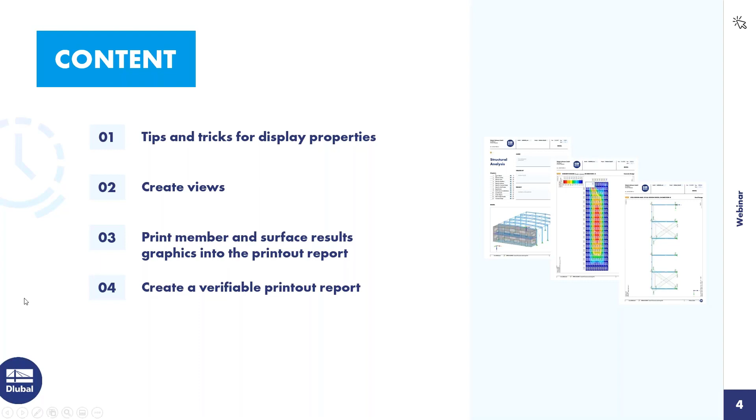Okay, then we turn to the program. That's the model of today's webinar. There are members of steel and surfaces of concrete. I designed the steel structure and that slab here. But before I start, I would like to introduce something - I would like to show you the loads.

So without results, we have the self-weight load case with the roof loads and the loads on the slabs. Then the imposed load with the loads on the slab.

The snow load case - for the snow load, I use the snow load wizard. I can display it by right-clicking on the load, not separately. That's the load from the snow load wizard.

And if there are members below, then the program creates member loads automatically, and you can see that here in that setting. Okay, the same is valid for the wind load case, wind in X direction.

I can display it separately as well. Here are member loads, and on this side, surface loads. So wind in X and wind in Y direction. I created only two wind load cases in this example.

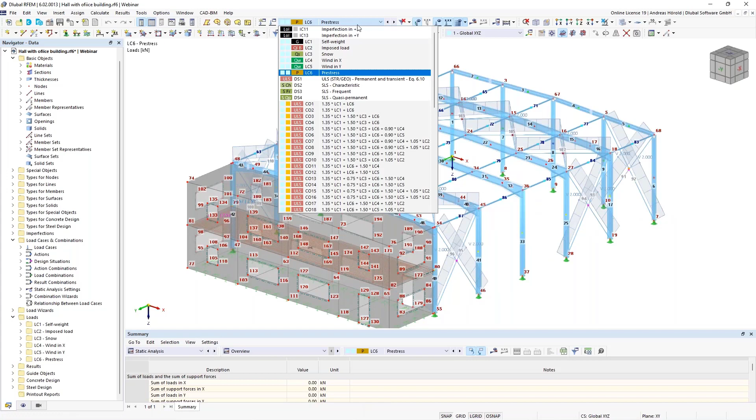And the last load case is the pre-stress. We've also got imperfection cases, so in X direction and Y direction. Okay, that's all for the loads.

Then here on the left in the navigator data, I right-click to open that dialog - load cases and combinations. I go through this dialog very quickly. In two weeks, I will present a webinar that covers the load cases and combinations dialog in detail, describing these dialogues only.

I used for the combinations the Eurocode 0. Now you can see here different standards, international standards. And for the Eurocode, there are a lot of national annexes implemented. I use the German national annex.

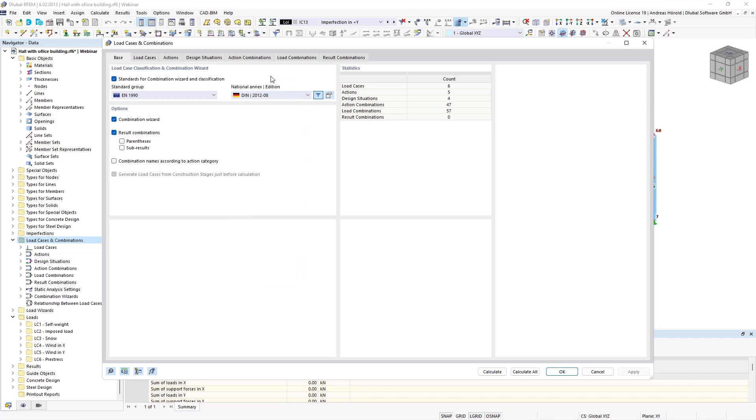Okay, then the load cases - the six load cases that I introduced at the beginning, the actions. For example, the wind action has the two wind load cases assigned, and they act alternatively.

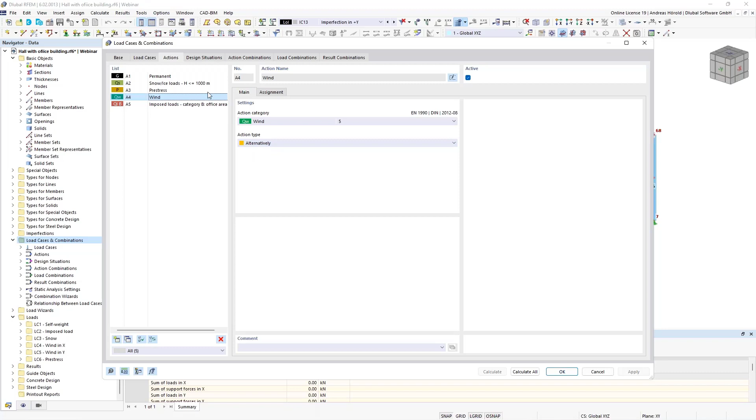Then the design situations - design situation number 1 is used for the concrete design and steel design, for the ultimate limit state design. Then design situation 2 for the serviceability limit state design, characteristic - it's activated for concrete design and steel design. These two design situations for serviceability limit state design are activated only for concrete design.

So if you click on overview, you can see which load combinations are assigned. I can click through them. Okay, and here in this dialog you can see all 57 load combinations.

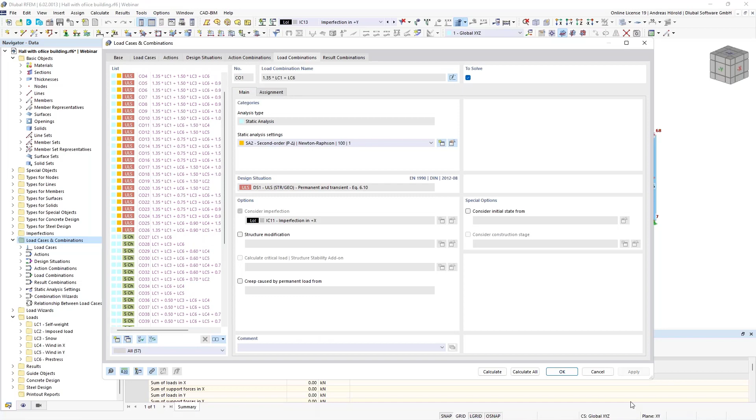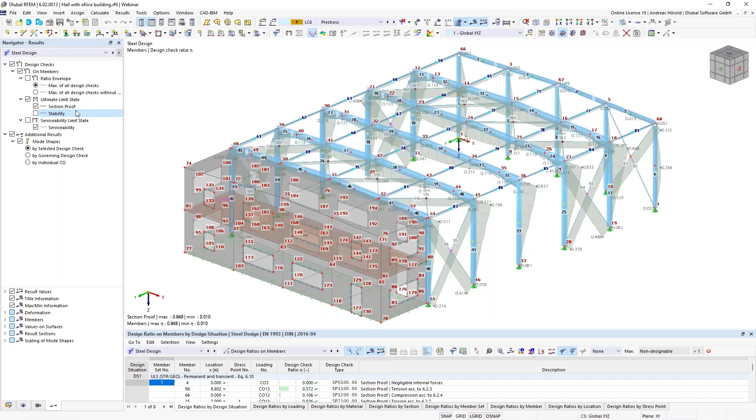Okay, although they are displayed in different colors, you can see it's quite confusing. That's why we print not only the isometric view with the separate design checks, but also create views in axis 1, axis 3, and axis A, with the multi-print feature.

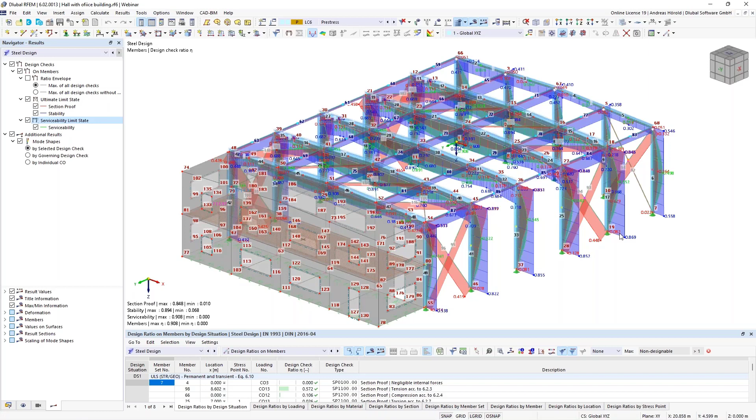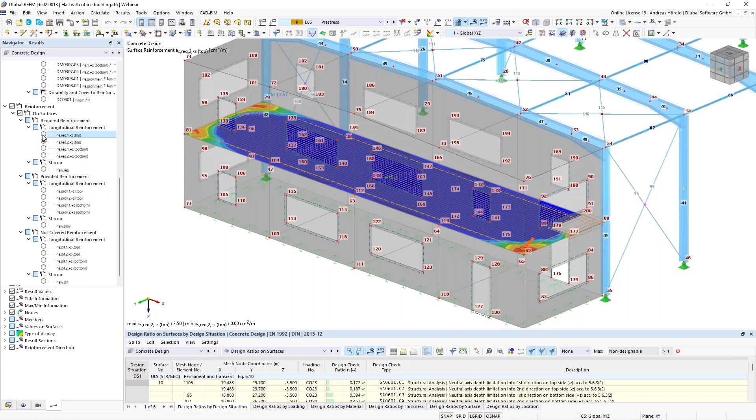Okay, I disable it. So then I show you the concrete design. I designed only this surface here, the slab. I can zoom a little bit in with the mouse wheel. So here in the navigator results, I can click through the required reinforcement, and I would like to print these 4 graphics in the printout report later with one step.

Okay, then parts list. We will also print a parts list in the printout report. I will come back to that later. That's a new feature in RFEM 6 and RSTAB 9.

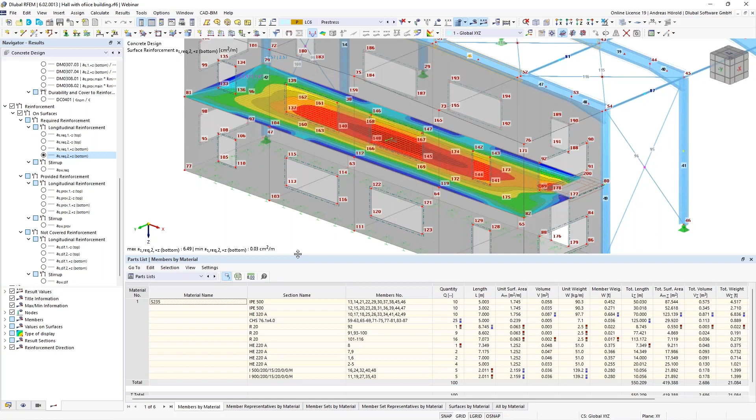So before we print anything, I define a line grid. Just a moment. Static analysis. So, line grid. Left above in the menu: insert, then guide objects, line grids. Usually you define a line grid as a first step, not afterwards.

I do that retroactively, and it's not a problem, you can do that anytime. I would add a label text. Then here, line grid, I have to enter the distances here in X direction, 4 times 5 meters. You can edit or change the labels here, but I leave it as it is for this webinar.

Okay, then also 5 meters in Y direction, 5 times. And a short distance, that's the distance between the concrete and steel structure. Okay, that's all. I can apply it, and I'll see it in the preview.

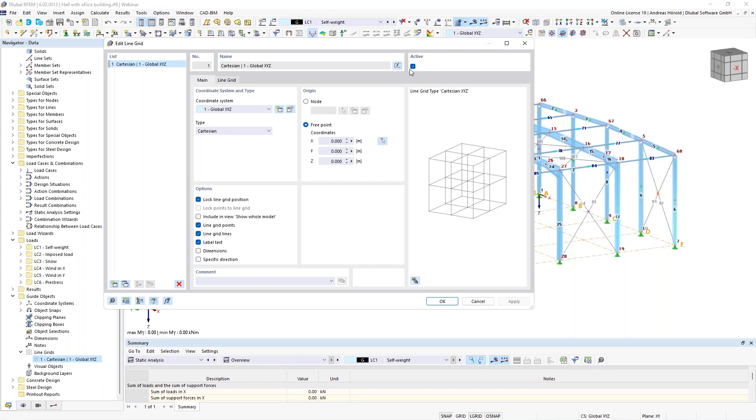Okay, if I would like to change anything in the display settings for the line grid, I can click on it with a right click and open it. Just a moment, I load the white background. So I can leave the dialog again.

So, right click, I show it again. Display properties, and you will get directly to the category here. And a tip from my side: the categories in the display properties are similar to the categories in the navigator data and navigator display. If you want to find anything, you can right click on the object, find it here, and it's easier to find the object in the other navigators.

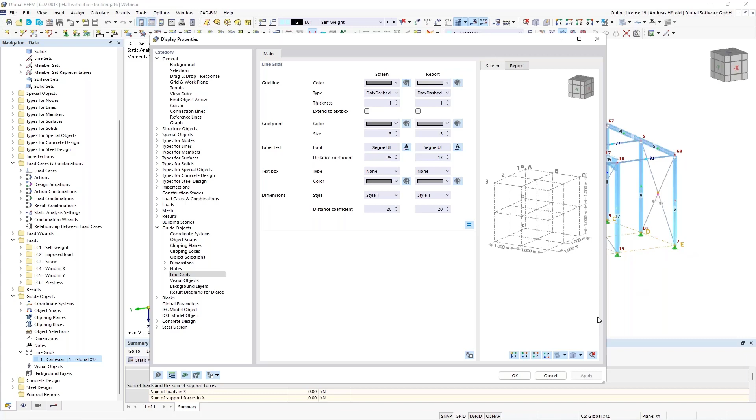Okay, then I change the font to bold and size 12, and change the distance here. Okay, and just take a look at the text here. When I press apply, it will be larger. Okay, so now the line grid is complete.

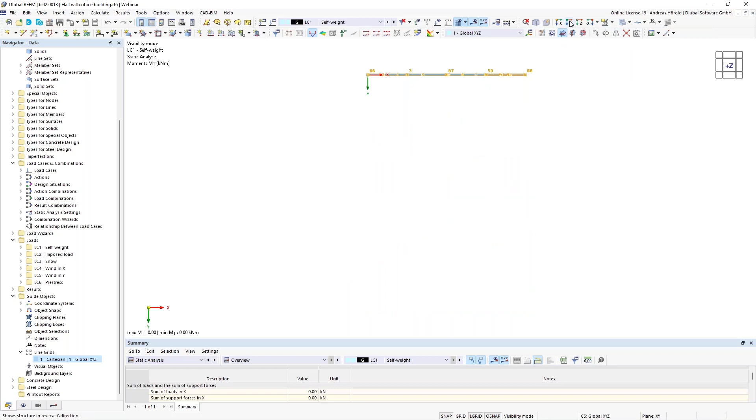I know where each axis is and can start with the views. Here right above, I click on view in Z direction. Then I select all objects in axis 1. Press visibility by selected and related objects. Change the view in -Y direction. Okay, and that's the view I would like to create.

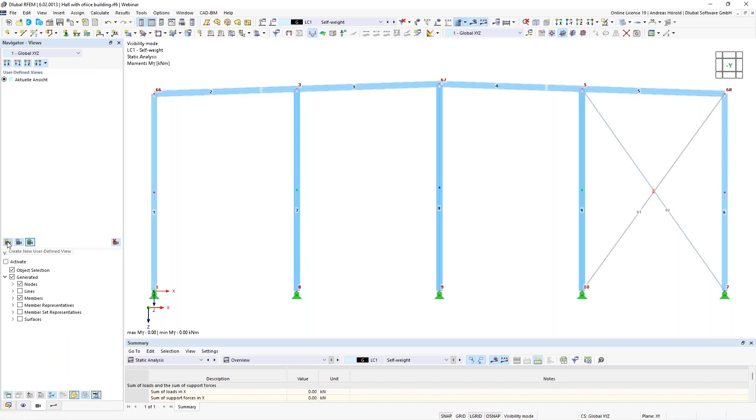So at the bottom here on the left side, I change to the navigator views and create a new view with that button here. So I call it axis 1. That's the first view.

Right above, I click on cancel visibility mode, change the view, select all objects in axis 3. Then I display only these objects, change the view again, and I can save the next view, axis 3.

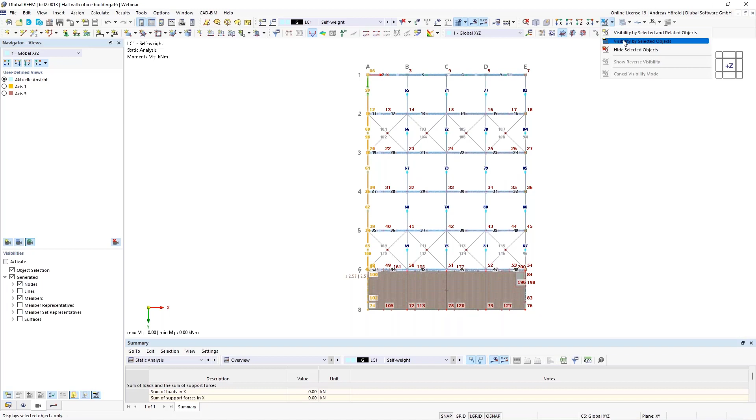Okay, then the same workflow again. So, all objects in axis A. Then view in -X direction. Okay, I can zoom a little bit in. Now I can cut the concrete structure, it's not interesting to our results for the steel design. So, axis A.

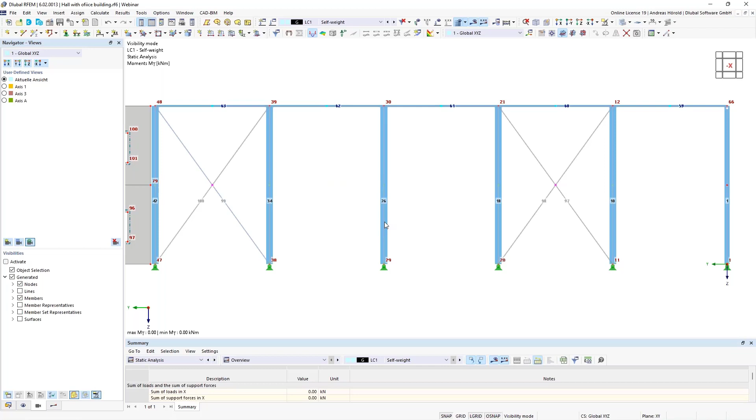So then I cancel the visibility mode again, and I select the concrete slab. Let's display only this one. Change in Z direction. And I would like to create a view also for this slab. So as you see here, I created a surface reinforcement for the concrete design. It's a mesh.

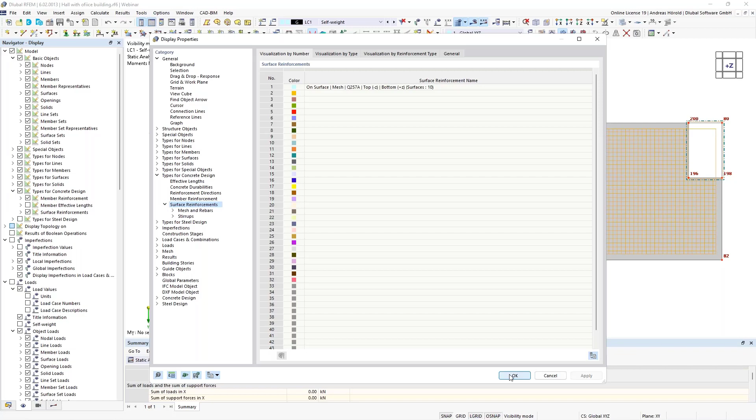Q257A, sorry. And I would like to deactivate it, or I don't want to display it, so that it doesn't disturb the displaying of the results. But I'm not sure where I can find it in the navigator display. That's why I apply the tip I gave you: right click, display properties. You can see in the category under types for concrete design, you can find the surface reinforcements. You could change the color here, but I don't want to change anything. I used it only to find the category for the navigator. Types for concrete design, surface reinforcement - I can deactivate it for the display.

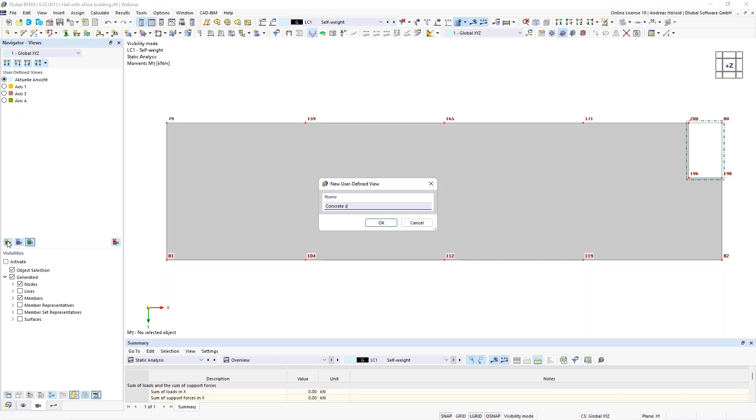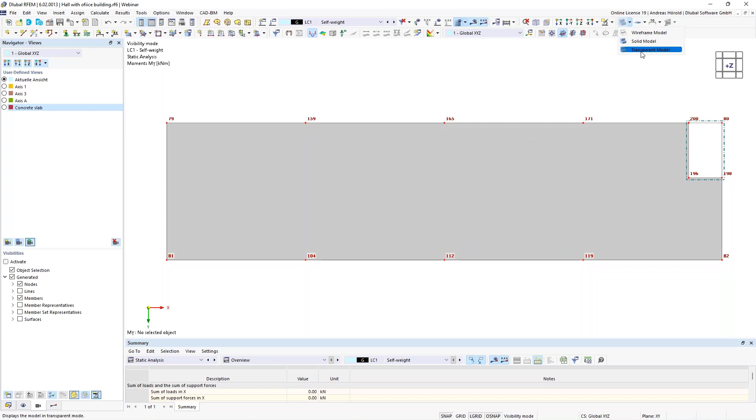Okay, then I create the next view. Concrete slab. Now I recognize that the gray color here can maybe also disturb the displaying of the results. I use the view transparent model and change to wireframe model. But now I have to update the view. How to do that? I unlock the views with this button here, then with the middle button I redefine according to current view, then I lock all again, and then I can switch between different axes and see the view is updated.

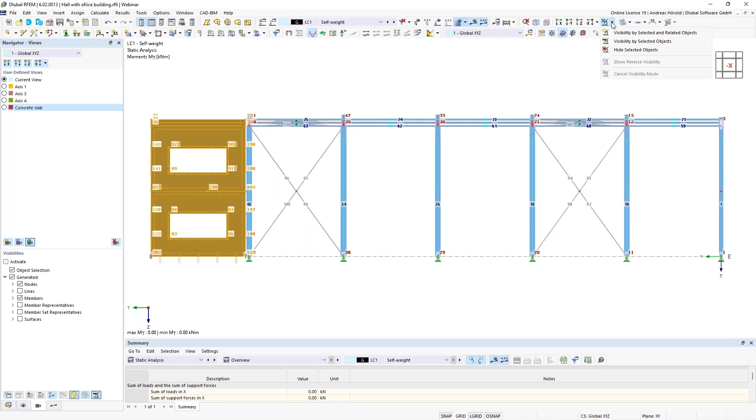So then all views are created. I cancel the visibility mode again and use the transparent model. For the isometric view that I want to print also in the printout report with the steel design graphics, the concrete structure maybe disturbs also the display. That's why I would like to deactivate it, or I don't want to display it. So that's why I select all, and here right above I hide the selected objects.

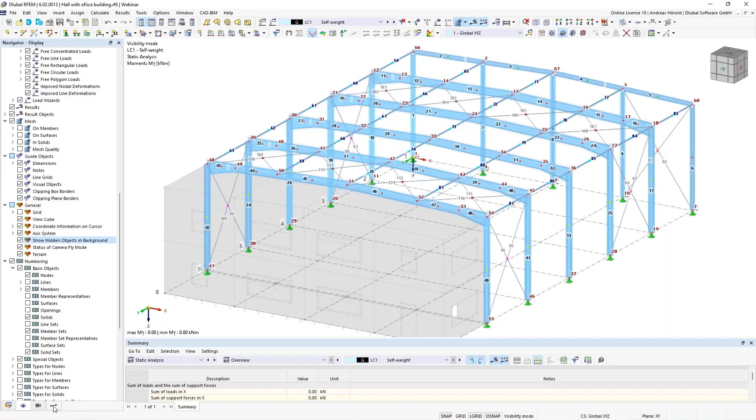So now it's not visible. Maybe we can display it but hidden. How to do that? I change to the navigator display, scroll down a little bit, and under the general settings you can show hidden objects in background. I like that more. So then in the next step we can print the steel results, so I can display them again.

So, okay, maybe I can rotate it a little bit. I would like to print that view and the other views. So left above here, you can open that drop-down menu and select print graphics to printout report.

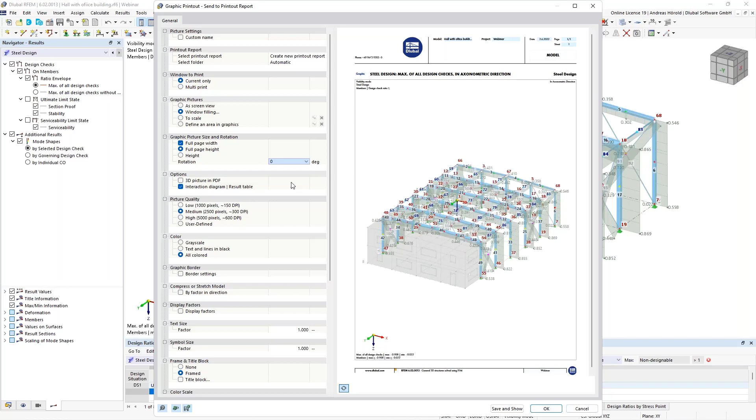So then you can see a preview here. You can rotate the graphic - that would be 0, and if you want to rotate it in a clockwise direction, then for example 90 degrees, you need to select this. But I would like to rotate it 90 degrees anti-clockwise, that's why I use 270. So you can use a screen view or window filling, it doesn't matter. And if you want to print only this graphic in the printout report, then press OK or save and show.

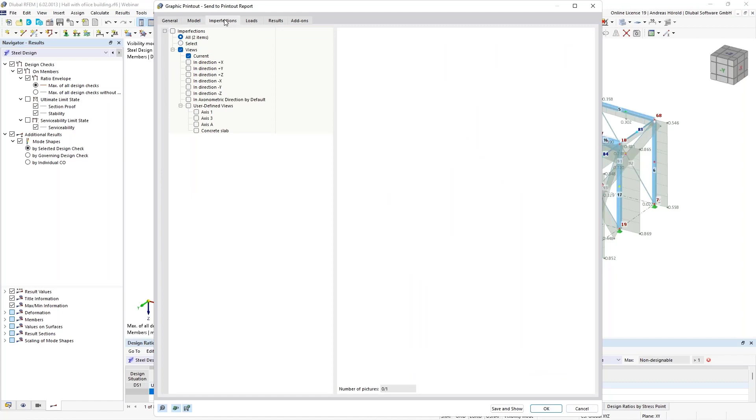That's quite easy, but I would like to use the multi-print feature. So I go through the single dialogues. I don't want to print the model, no imperfections, no loads, no results - it's of course possible to print the member results, for example the internal forces, but I would like to print only the steel design results in this webinar. So the current view, that was the isometric view, then the saved axis. Then on the right side I select the maximum of all design checks: the ultimate limit state, section proof, stability, and the serviceability limit state design.

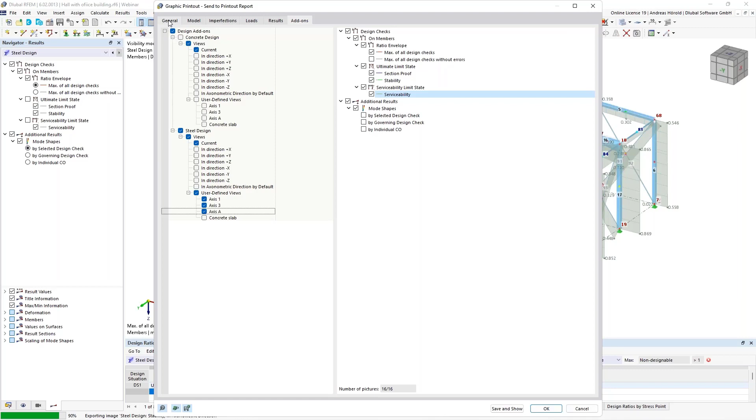So at the bottom you can see there are 16 pictures that are created in a few seconds. I switch back to the general dialog, and all images are created. So that's the isometric view with the 4 design checks. Then axis 1 with the 4 design checks. You can see in the preview it's quite good readable in the views. So this is axis 3, etc. Then I press save and show.

And we turn to the next dialog, printout report manager. Since we open the printout report for the first time, we have to select what we want to document. Here at the bottom left, you can load from a template. There are different templates already available, for example the input data and reduced results - that's the default setting - then the concrete design, steel design, etc. So I use the default setting. And of course you can save a template with this button here, save as template.

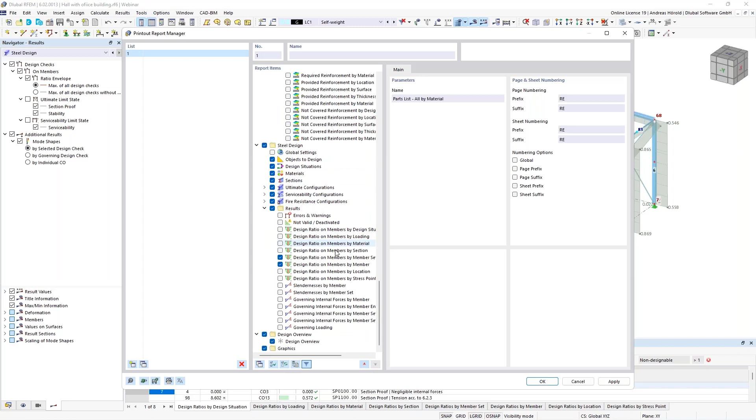Then the parts list - I select only this one and this one to show it later in the printout report. So then, for example, concrete design, where are the tables with the design ratio and surfaces selected, then the required reinforcement. For the steel design, the design ratio and members by member set and by members.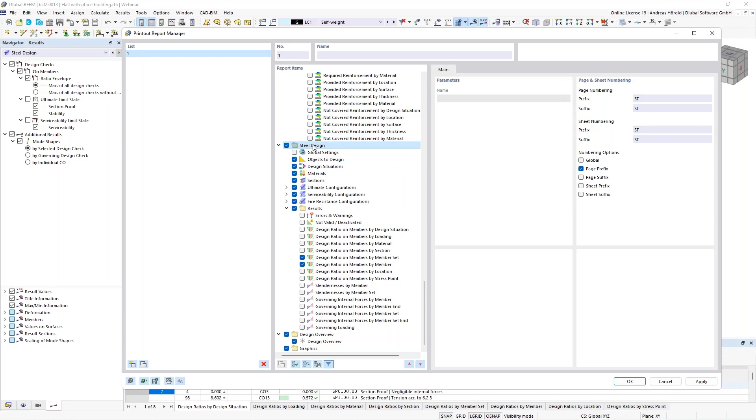On the right side, you can select page prefix, then prefixes will be added, for example for the steel design, ST, or for the concrete design, CO, or for the model, MO. Then the printout report is creating. At the first time it takes some seconds. Okay, that's the printout report.

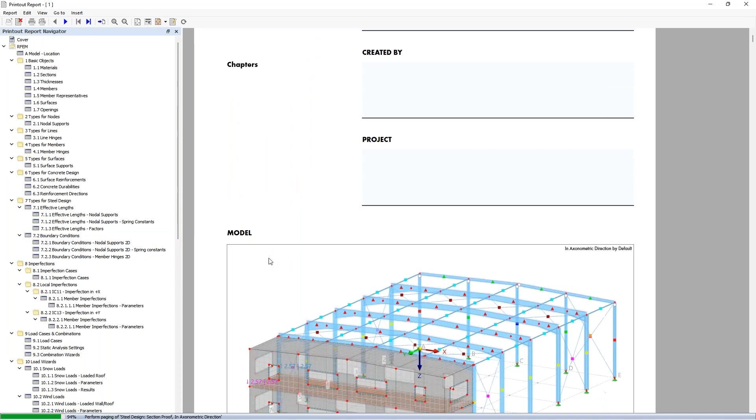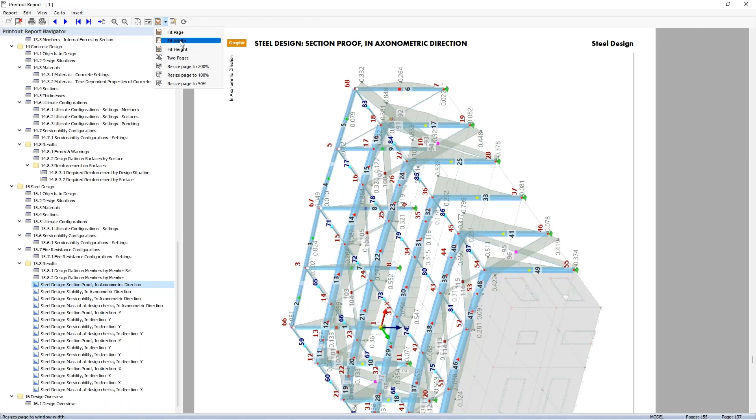On the left side, you can see the content, and what's interesting to us in the first step are the graphics here. Above, you can switch between different displays, for example fit page, fit width, fit height, and so on. 2 pages - I fit the pages.

Okay, so the 4 graphics for the axonometric view - then axis 1, axis 3, and axis A. As you can see, the last 4 graphics are with the concrete structure, and yeah, I can modify that.

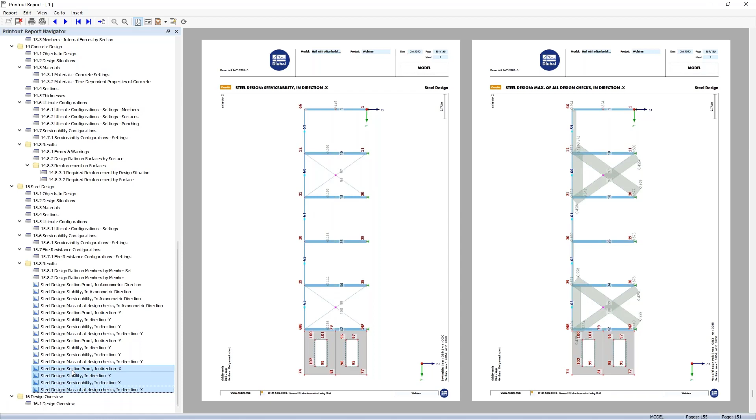With the Shift key, I can select all 4 graphics here on the left side. Then I do a right click, go to Properties, and select not window filling, but as screen view. All 4 graphics will be updated in the next seconds. So let's take a look. Okay, now the concrete structure is cut again.

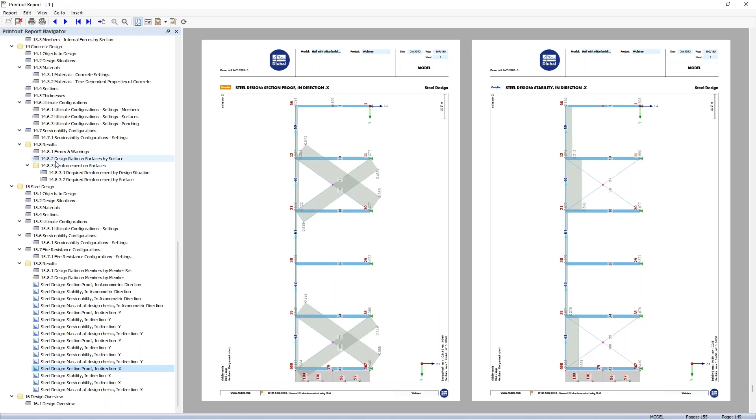So then I would like to show the parts list. I fit the width. Yeah, you can see in this table the section name, then the length, the total length, and the sum of the length, then the total surface area - for example, to calculate the coating or galvanizing - the total volume and the total weight. You can also document the total weight by material here, steel and concrete.

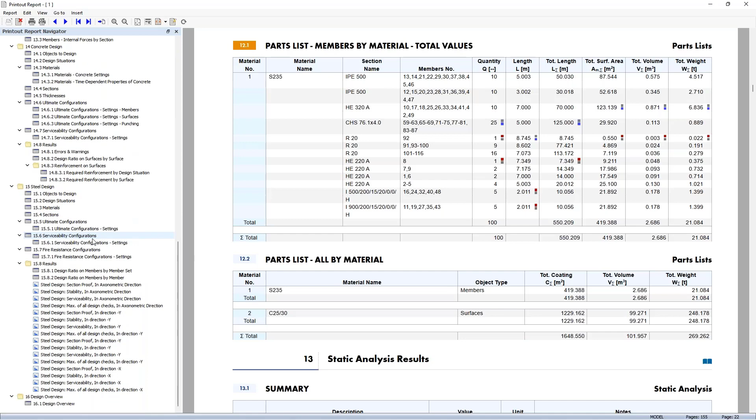Okay, then I moved the printout report a little bit on the other screen, and as you can see, I can work in the program and in the printout report parallel. So I move it completely to my other screen.

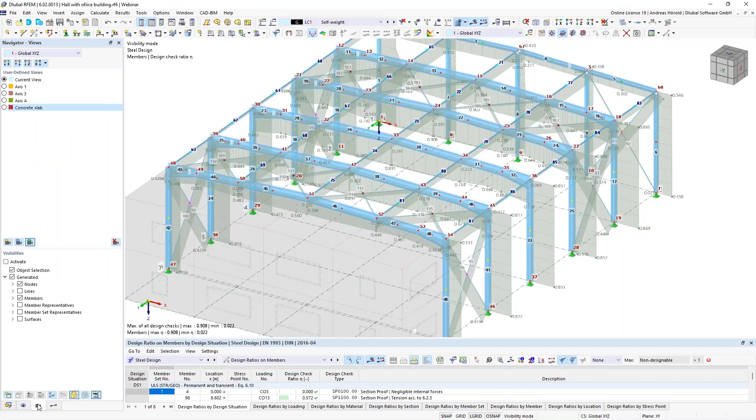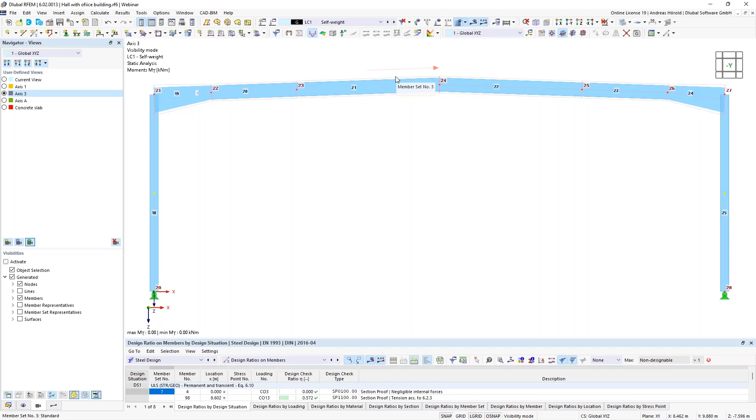I would like to show you another feature. I select axis 3, and I would like to print the result diagram of this member set here, the horizontal beam. That's member set 3, and I would like to print it in the printout report. Right click on the member set, then result diagrams.

So then I have to select here, results on member set. That's okay, but not the self-weight load case, but the ultimate limit state design as design situation number 1, member set 3. Okay, I would like to document not the global deformations, but all internal forces.

N, V, M. Okay, so 6 diagrams are displayed, and with that button above, or with the drop-down menu, print graphics to printout report, I can print that graphics. So all graphics on one sheet at the moment.

I can press here on the left side, determine diagram height automatically, and now it's much better. You can also set the diagram height manually. I tested it before - 7 centimeters is also a good parameter.

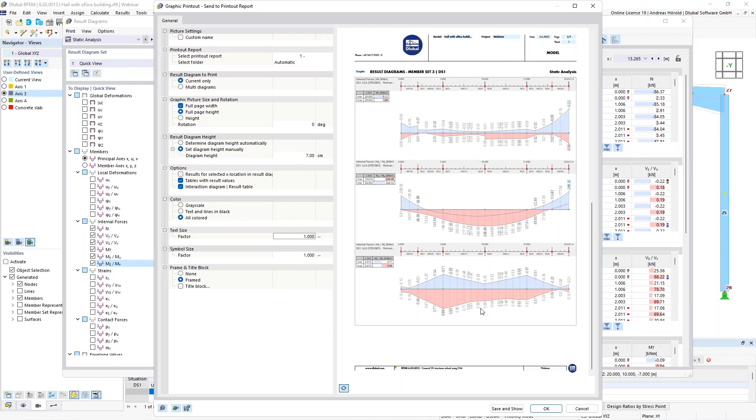Okay, then save and show. You can leave the dialog, and we can take a look in the printout report. Here is the result diagram. I fit the page, and you can see the 2 pages here.

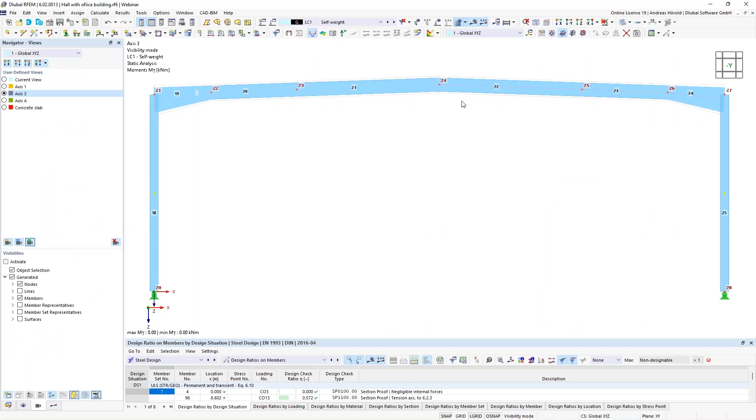Okay, that's all for the steel design documentation. I continue with the concrete design. So that's why I go back to the program. So I use the view concrete slab.

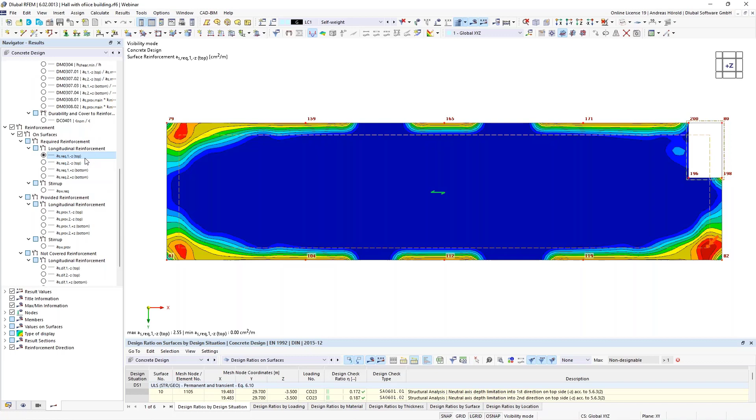Let's display the concrete design results. Okay, then I change here left above to the navigator results, and we can click through the single results, the two directions of the reinforcement on the top and at the bottom. You can see the direction of the reinforcement with that arrow here.

Okay, and I would like to display the values as well. If you want to delete one decimal place, then you can go here left above to edit, then unit and decimal places. And under concrete reinforcement, you can find the setting here, reinforcement areas per unit length. So, if I change that and press apply, you can see in the preview there's only one decimal place now.

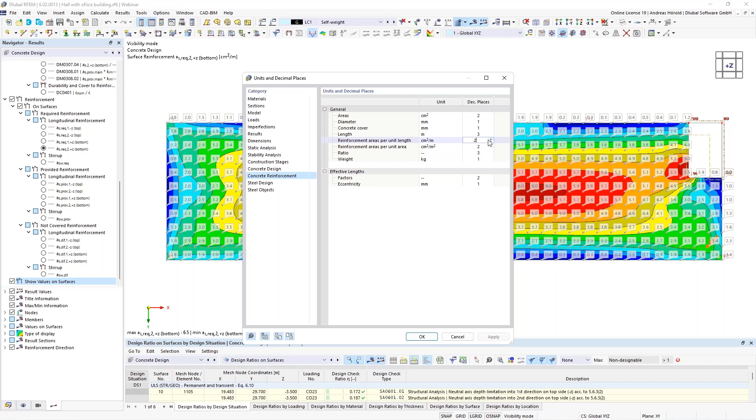Okay, I leave it as it is. Yeah, let's try it. Okay, then I print all again.

In the first step, I select the current view. The rotation is okay as well, window filling is okay, and I select the multi-print. I would like to print all 4 graphics.

So, concrete design, the current view, and the 4 results for the required reinforcement. I also select show values on surfaces. Here, 4 pictures will be created.

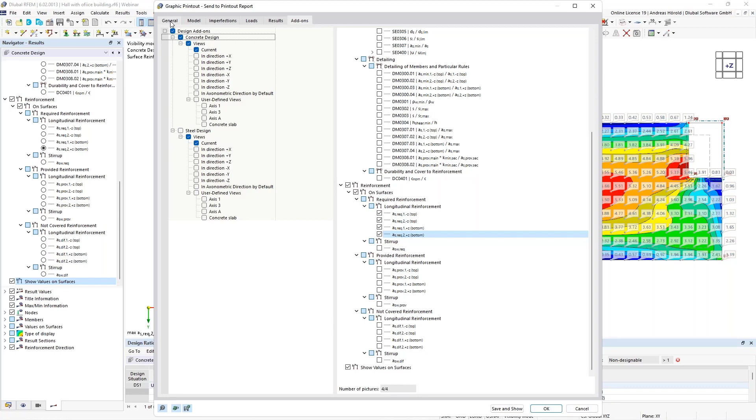We can scroll through the 4 images. Yeah, it looks quite good. Then we can press save and show, and go back to the printout report.

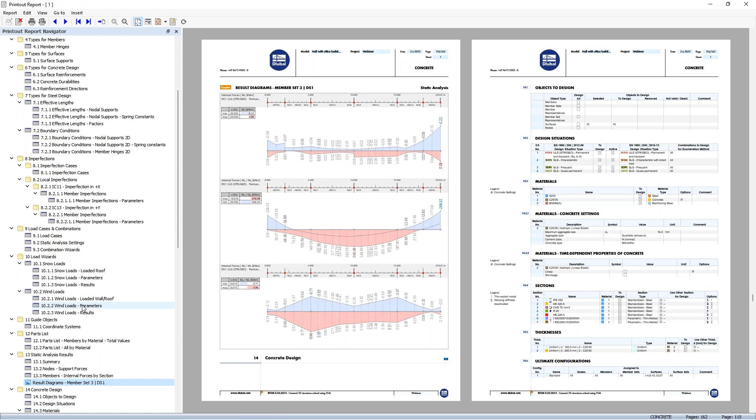So, take some seconds, all is updating. Now the 4 graphics are printed in the printout report. Yeah, I think that's quite easy, just test it. And that's all for the steel and concrete design documentation.

I will continue with general features of the printout report. So let's click through the menu, here left above, the report. Close report, it's clear, and so on, delete. And at the end, we will export the finished printout report to a PDF.

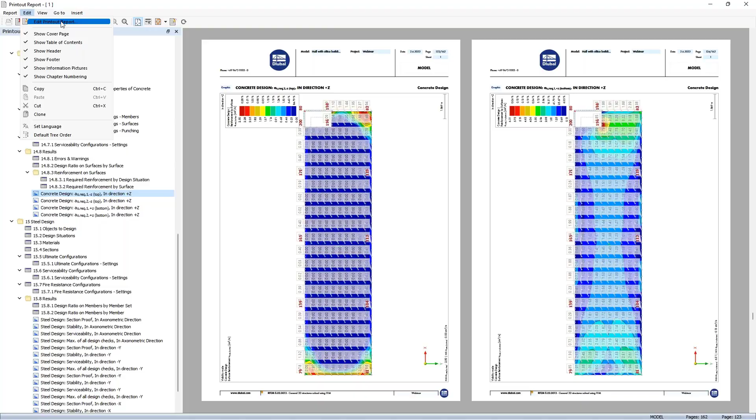So edit, you can edit the printout report. It's the same button as here. You can add more topics if you want.

So I go back to the printout report here. Then you can use the copy, cut, and clone function. Shortcuts, Control and C, are available, and so on.

So you can set a language. You can translate the full printout report in another language. I select French. There are 11 languages available in RFEM 6 and RSTAB 9, and it takes only a few seconds to translate such a printout report.

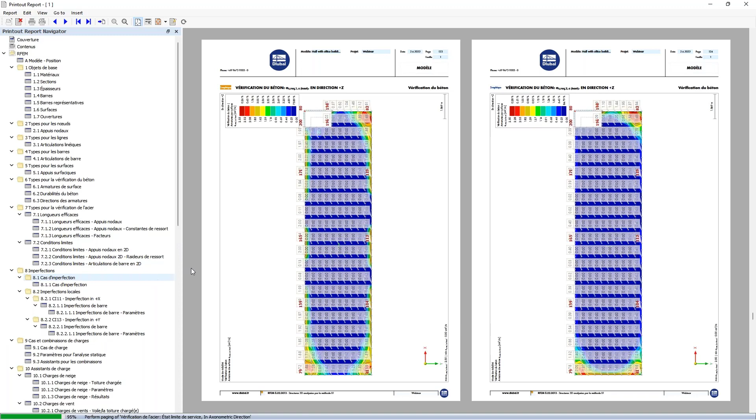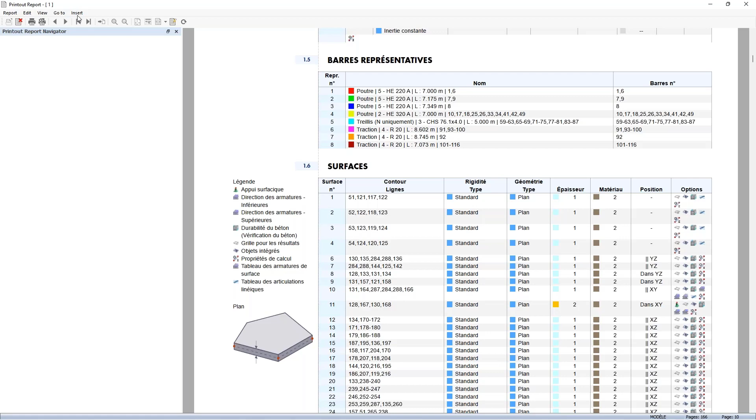Now we have got more than 150 pages, and you can see that it is already translated here, all is in French now. I change it back to English. Then we have to wait some seconds.

Go to, yeah, where are these buttons? You can switch between the different pages. You can open here, go to. I would use that buttons here, come to the end, to the beginning, to the next page, and so on.

You can also click through the menu here, or the content navigator. Then insert, you can insert different things: images from file, an image from clipboard, then plain text, rich text, HTML, formulas, PDF.

And I would like to insert a plain text and a PDF. The workflow is similar for all. So I start with a plain text.

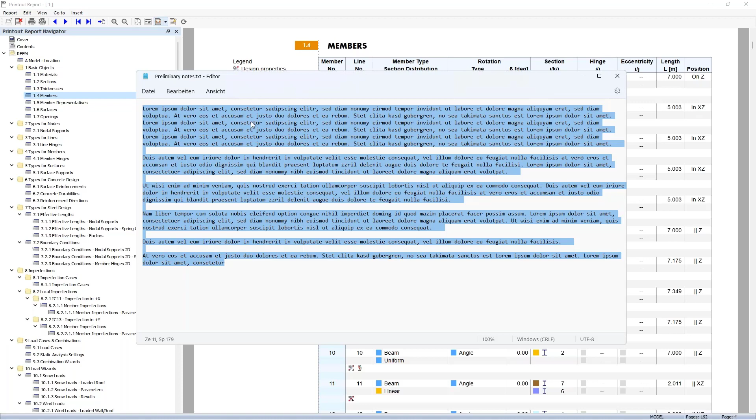For example, you have to add the preliminary notes. You can do it this way. I prepared a dummy text, and with Control C I can copy that, and Control V I can insert it here. Okay.

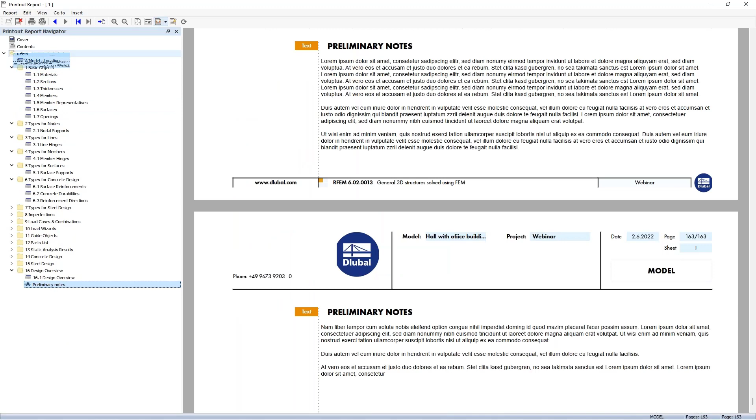It will be added at the end of the printout report. I close here some folders so that you can see that I can drag and drop it here at the beginning. Okay, now where are the preliminary notes, model location, and so on.

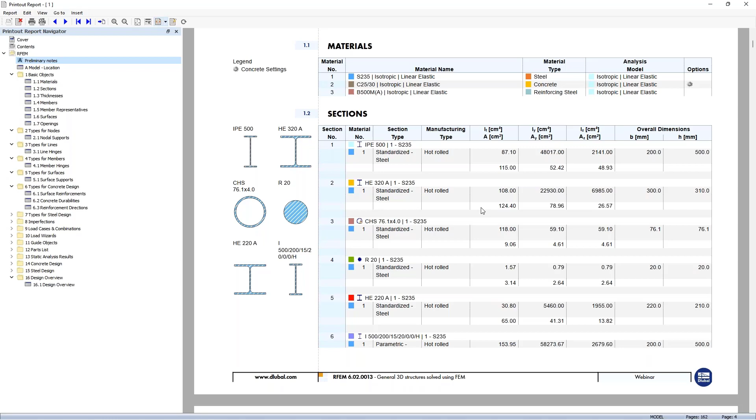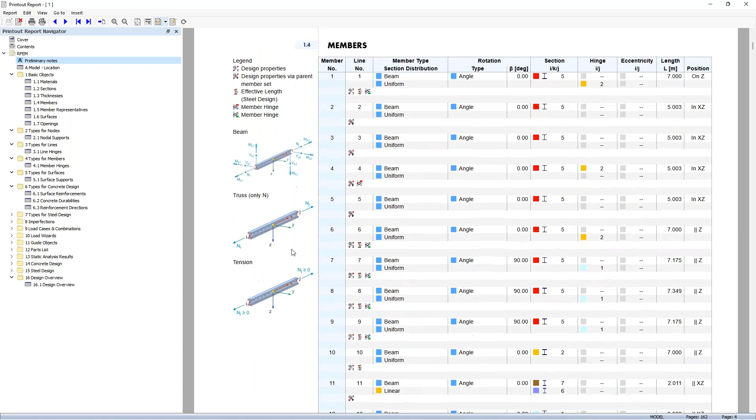Those are mini pictures. They support the tables, I think. Here the single sections, for example, the internal forces on the members, etc.

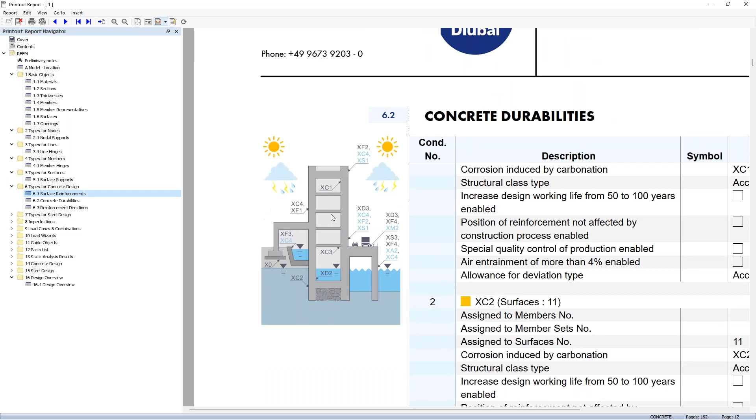So in the next step, I would like to insert a PDF. That's why I go to our website, dlubal.com in English. Under solutions, you can find the snow load, wind speed, and seismic load maps.

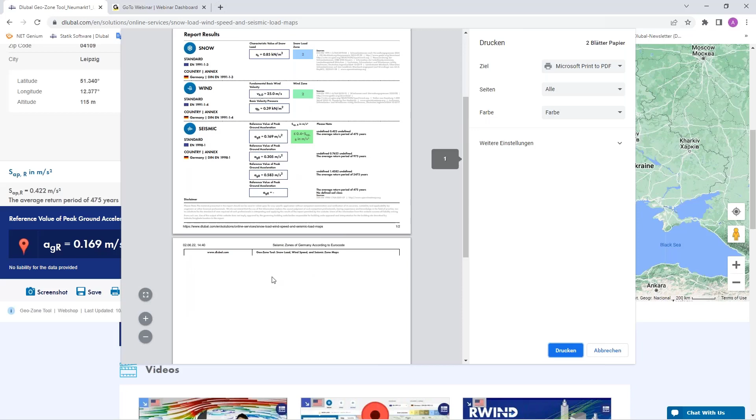With that button here, you can print it as a PDF, for example, or directly. Only page 1 is interesting to us, and you can see the map, the address, and the results from the load maps. Okay, I print only page 1, or yeah, I print all.

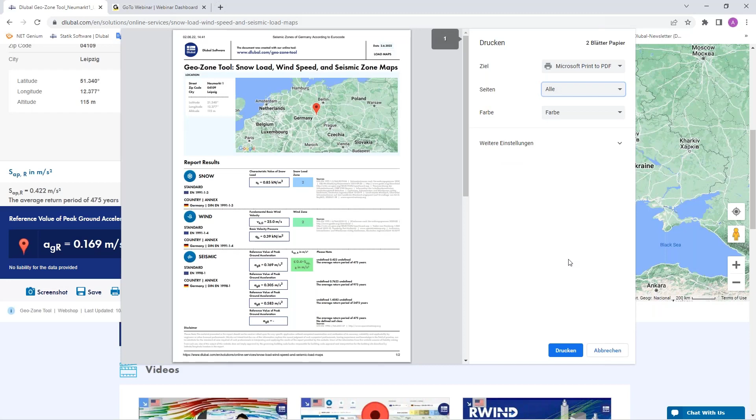Yeah, it's in German. My Windows is in German, sorry.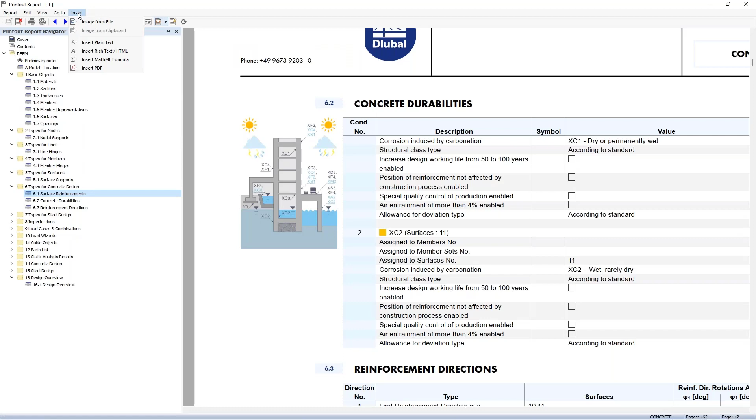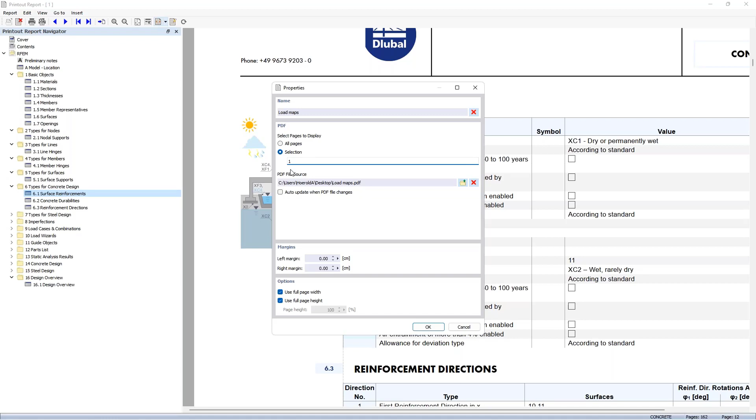I print it on the desktop load maps. Then I go back to the printout report, press insert, insert PDF, then desktop load maps. That's the preview, 2 pages open, and I can take over only 1 page, for example. I use only the first page.

That's why only 1 page has been inserted. I move it before the wind load wizards. So, the load maps with the values and then the load wizards for snow and for wind. Also here the mini graphics.

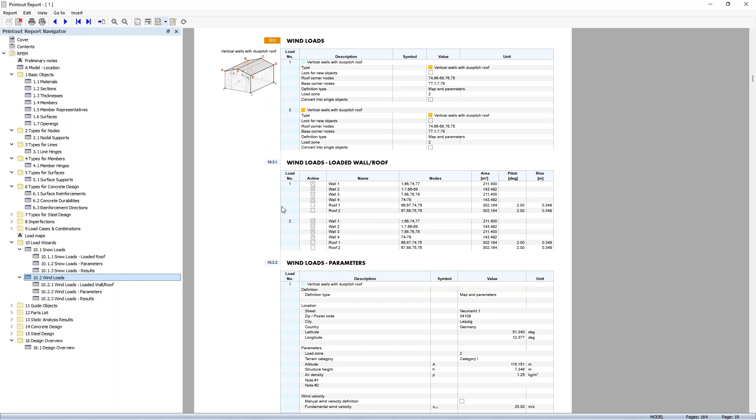Then in the next step, we come to the cover. With a right click on the cover, I can press edit. Let's go through the single dialogues here. Printer settings, I think it's clear. Page setup with the paper format. You can also select another format.

Then the margins, etc. Then other settings - you can enter the address of your company here. I enter Dlubal Software GmbH, then our address, Am Zellweg 2, in Germany, Tiefenbach.

I can save it as a template. I call it Dlubal. As you can see, there are 3 templates already available, and I save Dlubal for my next printout reports.

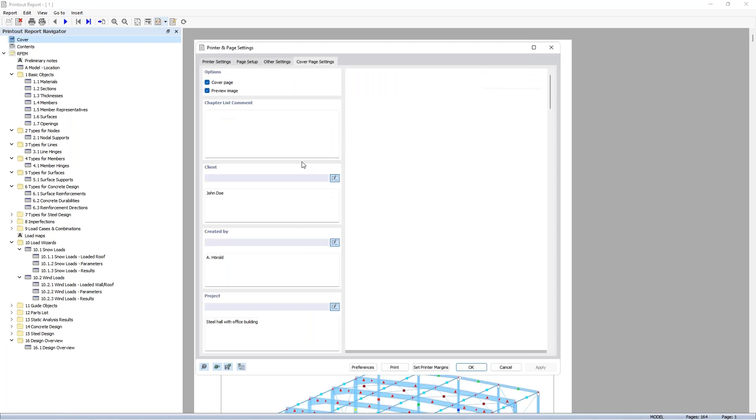Go to edit again. Here, the logo path, you can change it, of course.

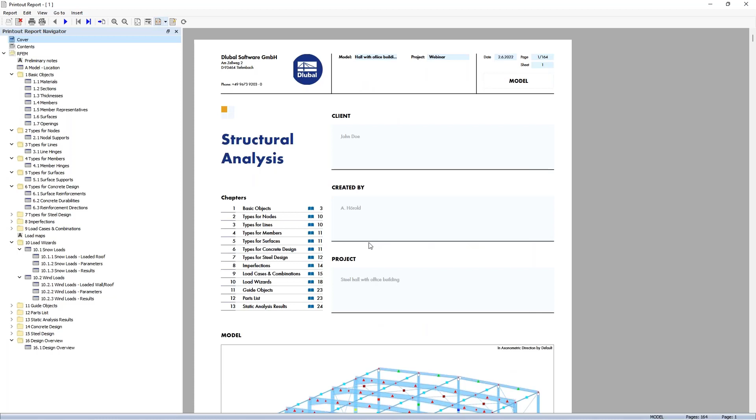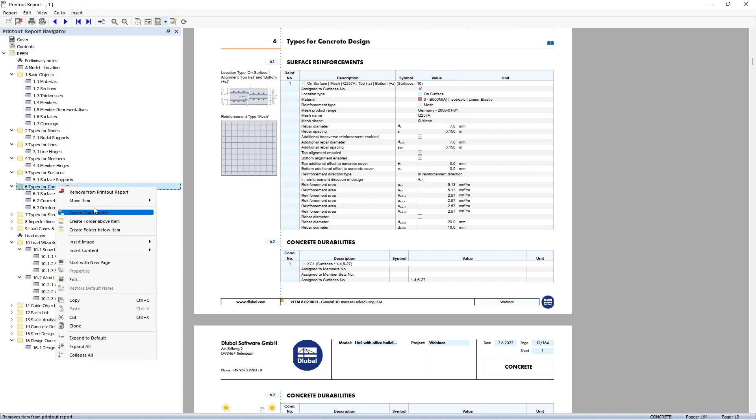So the next step I'd like to show you, the folders. You can move such folders here, for example, types for concrete design. If you do a right click, you can move the item to top, or move the item down.

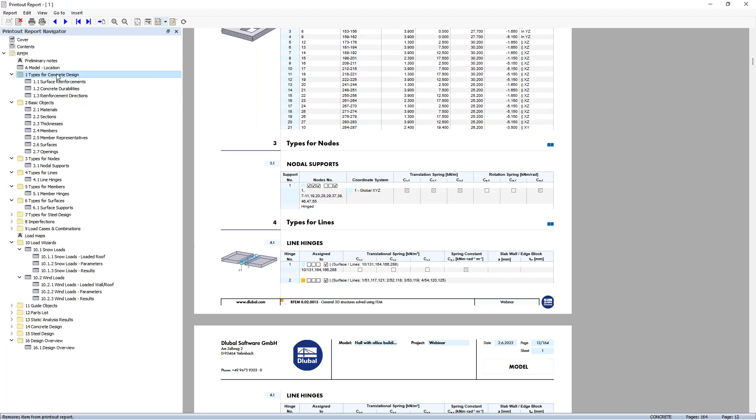It was on the 6th place, as I remember. You can also do drag and drop. You can create a folder, a child folder, or a folder above the item. I call it test to show it. You can add to this folder, for example, graphics from the printout report or PDFs or something like that. I delete it.

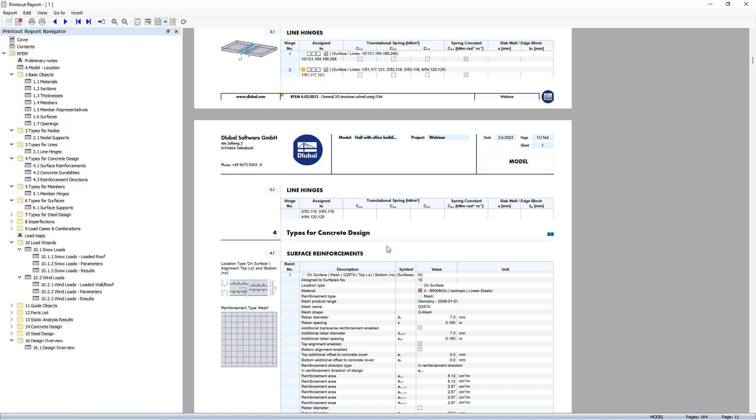The printout report is complete for this example. I can go to report, export to PDF, and I call it PR, printout report, save. In the next seconds, it will be finished. It's on my other screen. So that's the PDF of the printout report.

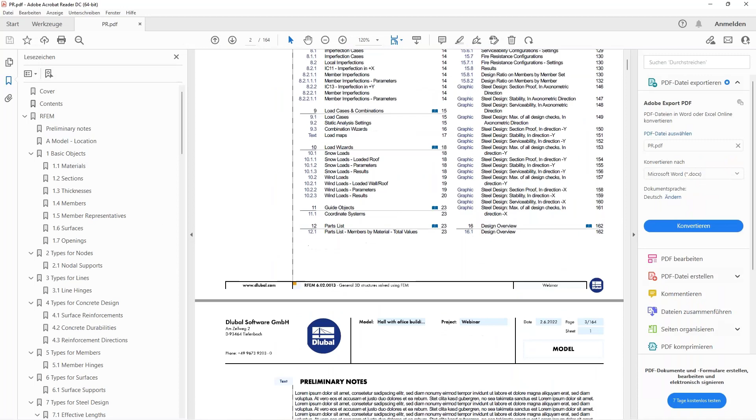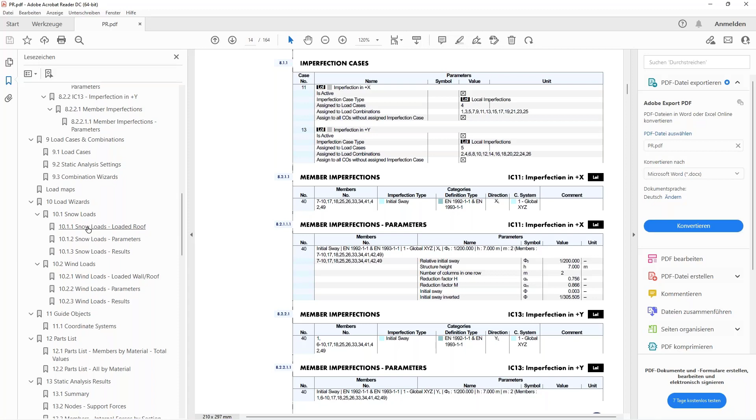And what I like are the bookmarks on the left. You can switch between the single folders and so on. Also a quite good feature.